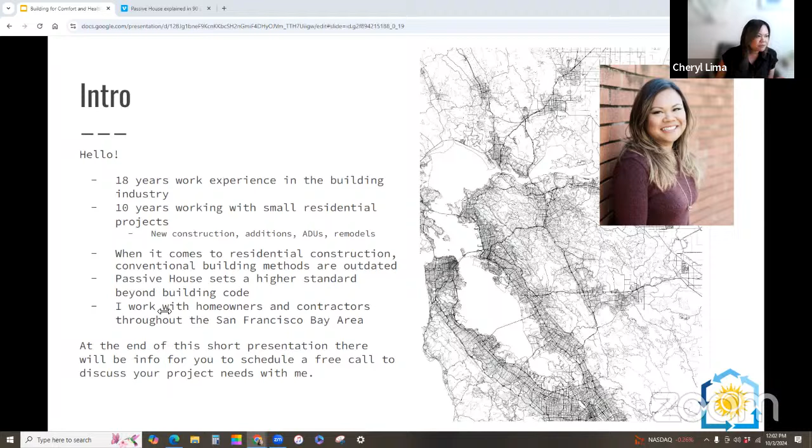So at the end of this presentation, if you have questions or you're interested in how passive house construction can apply to you, you can let me know, or there'll be my contact information there. Today shouldn't take too much time, maybe 20 minutes, but I'll talk about the 5 key principles for creating a passive house and how that will benefit you and your family. This applies to new construction and also remodeling existing homes.

So what is passive house? Even though the name house is in it, it actually applies to all building types. And the term passive is a design principle that was created when mankind first started building buildings, homes, and shelters. We would build homes around the patterns of the sun and the weather, in relation to the environment.

But now with the invention of indoor lighting and heating, we moved away from that passive design principle. In the 70s, here in the United States, the passive design movement came back. But actually in the 90s, a German scientist created standards to go back to that environmental interaction and how to build homes, setting a standard to reduce our energy loads and maintain comfortable indoor temperatures even when outdoor temperatures are extreme, like they are now in California.

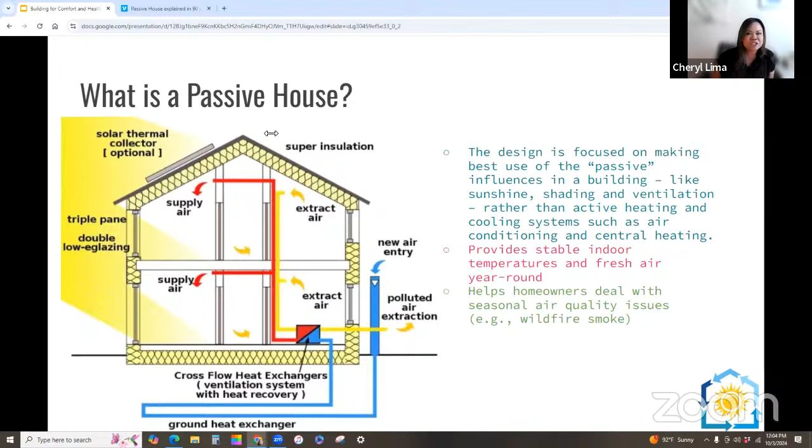We're going through another heat wave, and excessive heat warnings keep coming up on my phone — wherever you're at, you might be getting those too. So our climate is changing, whether we accept that or not. Here's a quick video to go over the overview of Passive House.

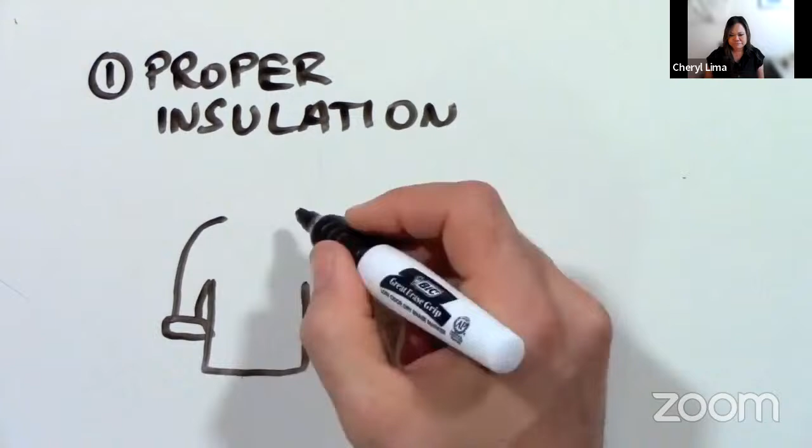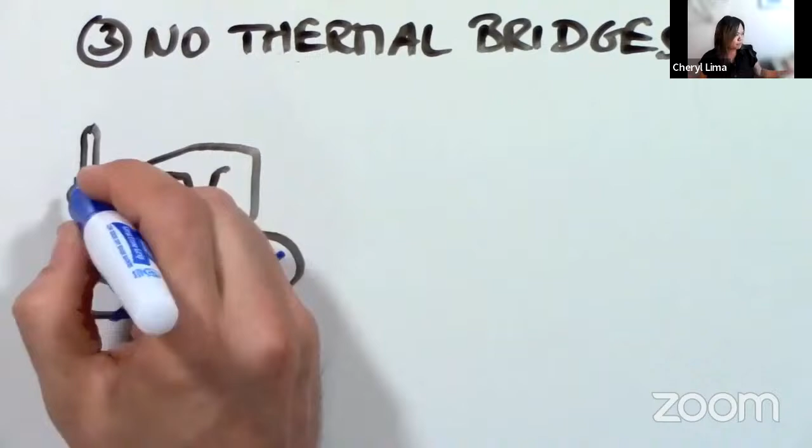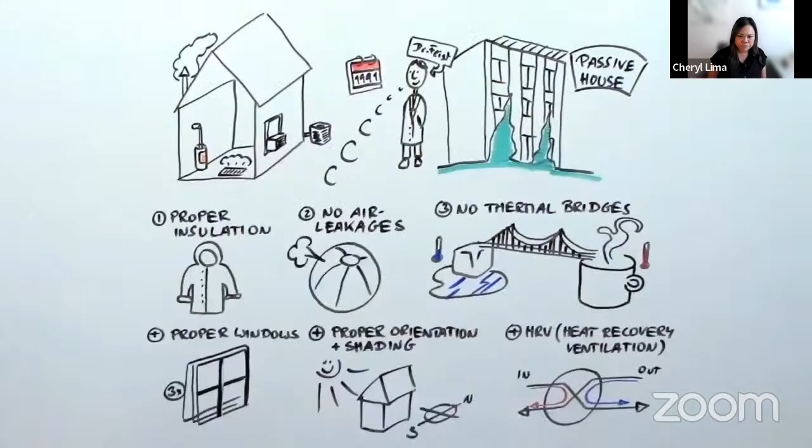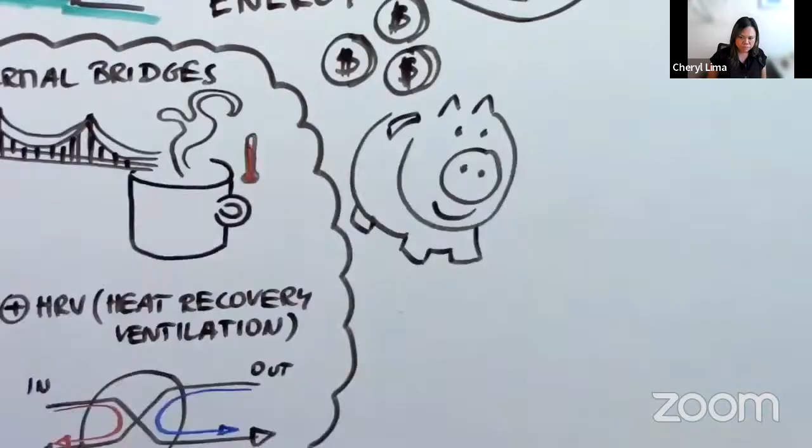Passive House explained in 90 seconds. Does your house have a heater in the basement or maybe a fireplace? Probably also a central air conditioner or maybe a window unit. Did you ever wonder if it was necessary? In 1991, Dr. Wolfgang Feist built the first passive house in Germany based on research from all over the world. Here's what he did: 1. Proper insulation — it's just like wearing the right winter jacket; it doesn't need a heater. 2. No air leakages — there should be no holes, small or large, to let warm air out of the house. 3. No thermal bridges — a thermal bridge is like a road for heating energy where warmth can travel right through your walls; most houses have thermal highways in their walls where heat can easily escape. Plus, the house needs proper windows, usually triple pane glass, oriented so the sun heats it in winter and shade is provided in summer. It uses an HRV, a device that provides fresh air without letting the heat out. Add it all up, and your house doesn't need a heater or air conditioner. So where does the heat come from? A passive house needs 90% less energy, easily supplied by your body heat, the sun, appliances, light bulbs, and even your TV. This saves you a lot of money on your heating bill and helps preserve the environment. Did we make it in 90 seconds? You bet we did.

So that's just a quick video, and I'll go through those components that were mentioned. The first principle is that winter jacket — creating a thicker layer of insulation.

It's almost similar to a cooler that keeps your cold drinks cold — it usually has a thick container, a thick layer of insulation, to help keep the cold air inside.

So how this applies to buildings is when you have that thick insulation, you keep the warm air inside when you want it in the winter, and during the summer you keep your cool air inside with the insulation. So here are examples of, in the case of maybe a remodel, you can place insulation on the interior side, and this is a product called Rockwool.

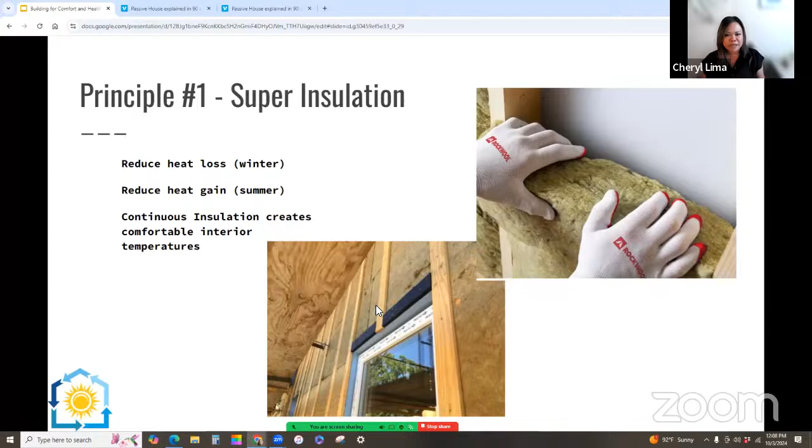Or for new construction, or depending on your climate, you could install the insulation on the outside of your home. So passive house, the difference between this and a regular home, like code here in California requires wall insulation to be R15, R19, where passive house can go up to R45 or even R60, and the insulation would be on your ceiling and foundation.

The next principle is airtight construction. What this does is create a continuous barrier around your whole house. If you think of a rocket or a car, when you close the door, you have an airtight container, and this allows the reduction of drafts, acts like a windbreaker, and reduces moisture and heat loss, not to mention pests, tiny ants, getting through little crevices in your home.

So the way this is measured in passive houses, once the air barrier is applied - in this case they're showing it as an interior air barrier - there's a blower door test where you would basically blow air into the home through the front door, see where it leaks out, and make any corrections where any holes are found.

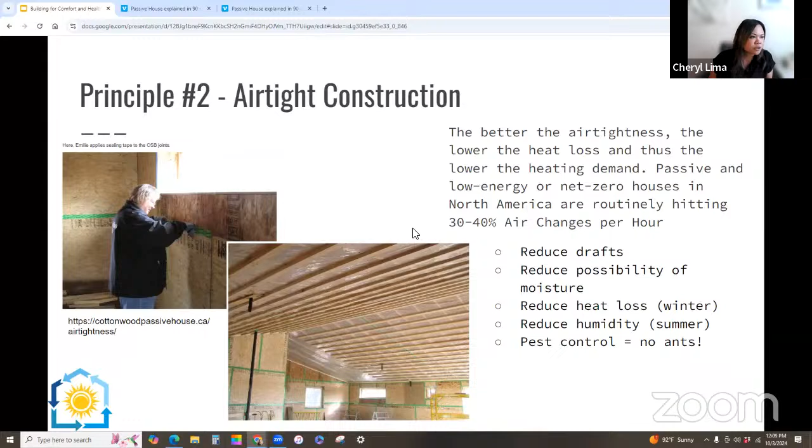So the next principle is eliminating thermal bridges. That's where passive house separates from regular construction. We're looking at the entire building envelope as your thermos or your Yeti cooler, to ensure consistent thermal properties of your whole building.

Actually, heat can escape through certain materials like metal, whether it's nails or clips, or maybe you have framing for a balcony. Those are points where heat can pass through, and the goal is to create that consistent layer, because inconsistencies could cause moisture to build up and also mold, potential places for mold to grow. If you're not aware, actually 70% of buildings have mold because they're not built with these types of standards. And as you know, mold can contribute to a variety of respiratory illnesses, including increased rate of asthma.

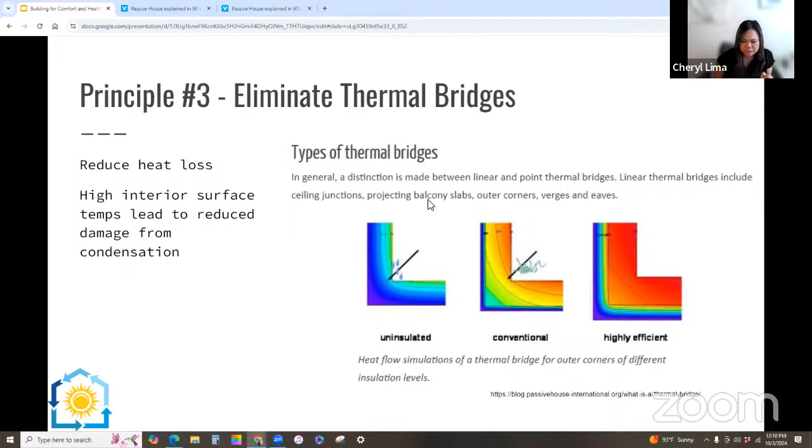So this is where the healthy environment is a big factor. And then the fourth principle is high performance windows. If you think of the cooler again, if there were holes in the cooler, if you wanted a window to see what you had inside there, that would be a potential point for the air or the temperature to leak out. So the windows being more high performance - normally we see single pane windows here in California, but for a passive house you'd want to upgrade those windows to maybe a triple pane.

Well, because we are in a temperate climate, if you have proper shading, you could even go down to maybe a double pane window. So these high performance windows help create the air tightness of your building or your home, and add to the quiet environment - once you close that window, you can block out traffic, airplanes, a lot of noise.

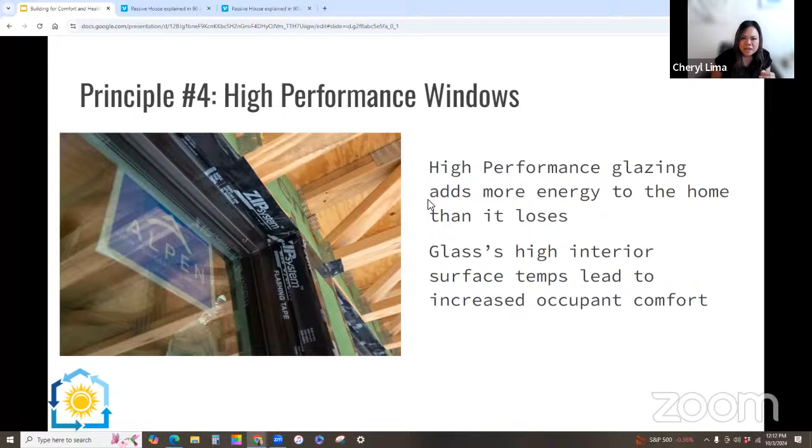And then the fifth principle mentioned in the video was the mechanical ventilation, or the HRV. This is a picture of a heat recovery ventilator. What this does - it's like the lungs of your home or building - because you have that airtight barrier, you need this mechanical component to take out all the stale air and filter the fresh air coming in. What's nice about this type of ventilator is it actually controls the humidity level of your interior environment.

So during the winter, when the air gets dry, humidity levels inside a regular house can go as low as 25%, but actually the healthy range is 40 to 50% humidity, because you want to prevent that dry air that can cause dry skin or dehydrated mucous membranes that could make you get sick easier.

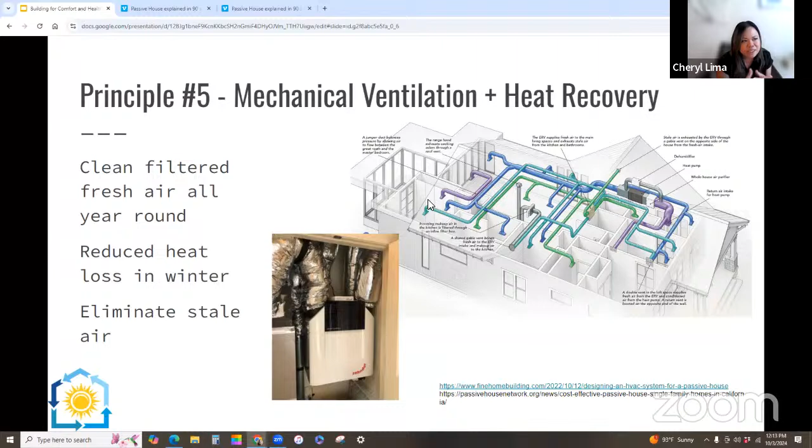So I mean, that's pretty much it - a quick overview of the 5 principles of passive house.

In summary, passive house methods empower us to build better, turn outdated homes into durable, resilient buildings that can cut down energy use and carbon emissions. And I forgot to mention that due to the air tightness requirements in passive house, that actually helps with fireproofing your home, and preventing embers from getting in through vents, because of the higher standard of components required in a passive home.

So it's something to keep in mind - if you're spending hundreds of thousands of dollars on your home remodel or addition, now would be a good time to incorporate these building components to improve the resilience of your home, filter out the harmful particulate matter or allergens in the air, and not to mention reduce your monthly fees on energy costs.